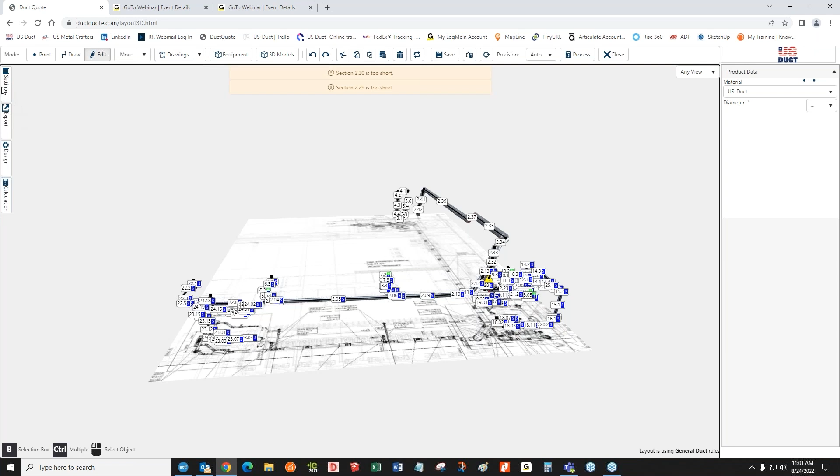The first thing we're going to have is when you see an error pop up that reads, cannot find an elbow. And this happens when you are processing one of your layouts. So I'm going to pop open an example here of where we might see something like this. And we can turn that off. And we can turn a lot of this off, actually, so it'll be easier to see.

So here we have, and I'm going to zoom in on one part that's really obvious. We have what is being asked for is a heavier gauge system, okay? So if it tells you that it cannot find the elbow, one of the very first things to do is to come over here in design and scroll down and take a look at elbow type where it has here, okay? Now, this is the one that tripped me up last week.

Your choices here are stitch welded or tubed, and this is for elbow types below 8-inch diameter, okay, for 1D and 1.5D radius. Now, if I'm asking for heavy gauge, which I was at the time, and I'm asking for stitch welded elbows, guess what? There is no such thing because you cannot stitch weld heavy gauge stuff. So the thing to do is to come in here and change that to a tubed elbow. And that'll allow you to get that heavy gauge.

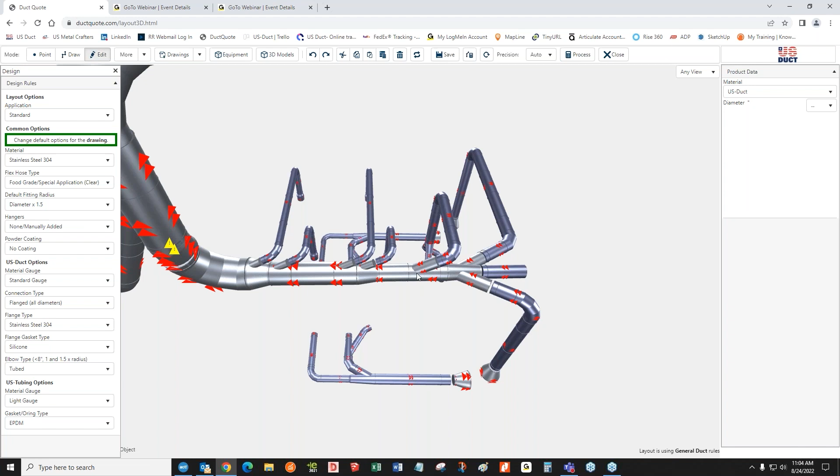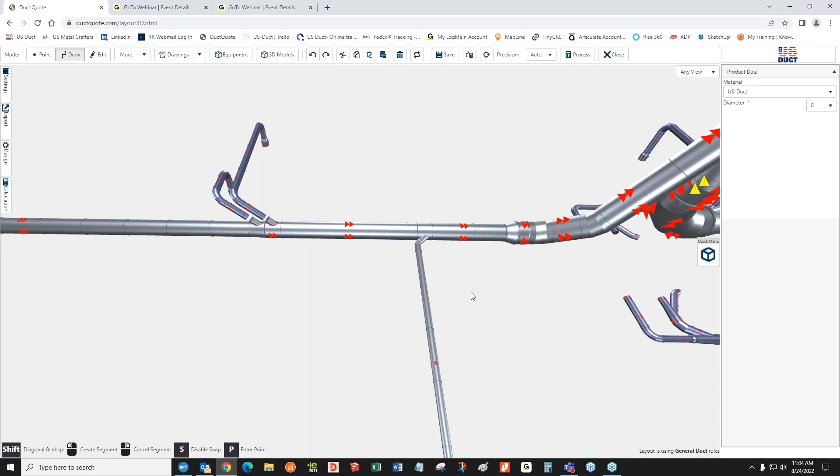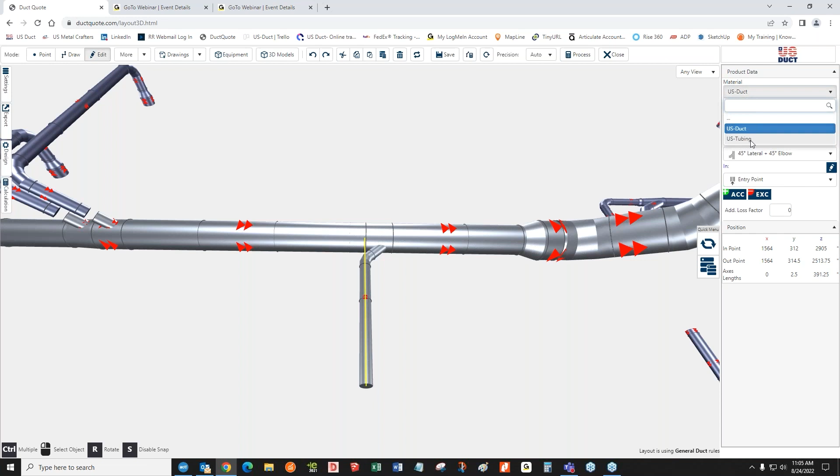Now, what if I need this to be US tubing? Well, I simply select that section that I'm going to change, and I can change it to US tubing. Here's the problem. If you look here, this is all being asked to be US tubing because that's where the section goes in. I'm using a default group of a branch plus an elbow, in this case, 45 degrees each. And DuctQuote will not be able to find this kind of a mixed situation because I'm using the default.

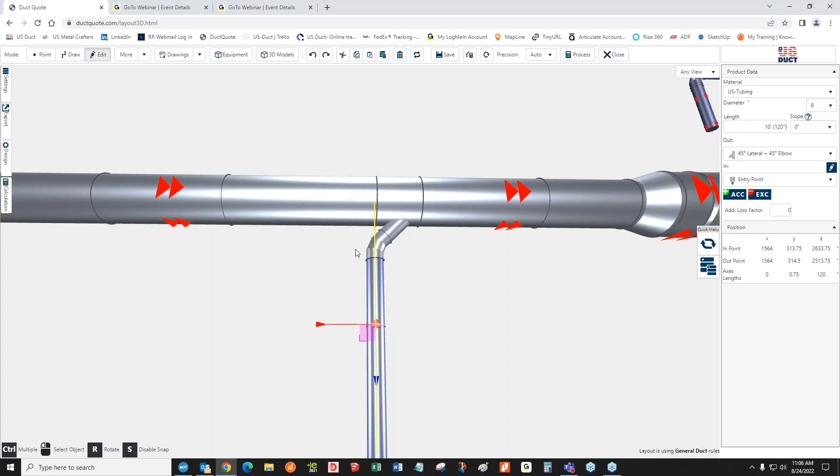Now, the way that I could get this to work is I simply have to redraw it so that I can choose an exact section where the change happens so that the entire elbow is US duct or US tubing, whichever one I decide, but I would have to draw the lateral stop and then the elbow stop, and then I can choose, you see?

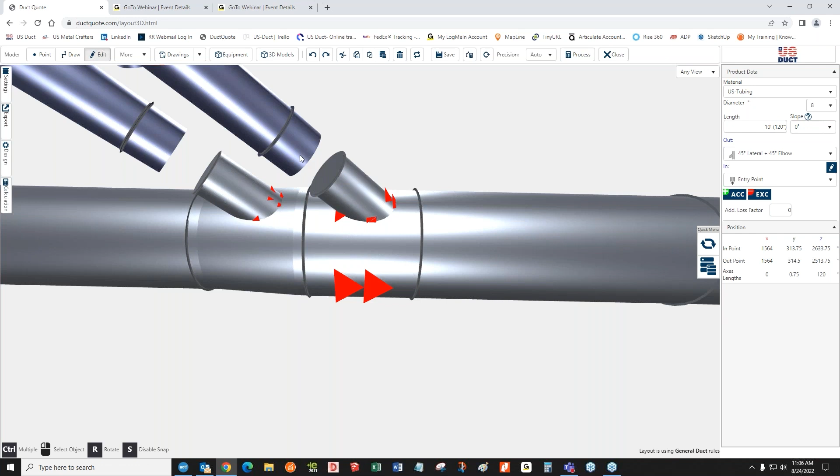Another way, which you can see right here, is I can put a space in between, and that makes life very easy for me because this entire thing is going to be flanged, duct flanged. And then I've put a flange adapter on the end of that US tubing. Okay. So that will take care of the cannot find the elbow error when you process. All right.